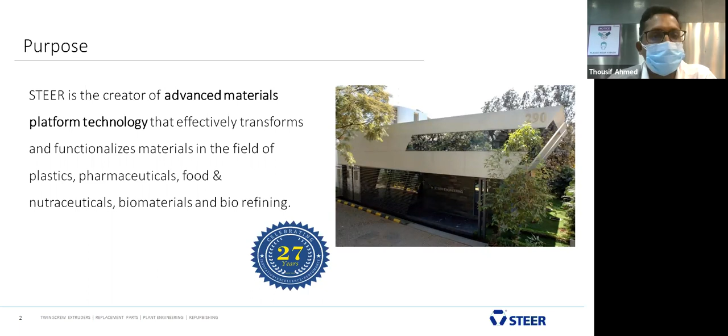Steer is a creator of advanced material platform technology. We focus on developing advanced materials which serve our society, industrial society, or even the nation. So it effectively transforms functionalized materials in the field of plastics, pharmaceuticals, food, nutraceuticals, biomaterials, and biorefining.

Some of the core people who drive and direct our organization and help us achieve our goals are Dr. Babu Padmanabhan, who is our MD and Chief Knowledge Officer. He is the founder of Steer Group. He has contributed to 100 plus patents which Steer has achieved, in different stages of approval. He is a creator of disruptive continuous manufacturing technologies. And Mr. Satish Padmanabhan is the joint managing director. He leads the corporate service group, and he also directs the whole group in the emerging business of Steerworld.

Mr. Subodh Jindal is the global CEO. He has more than 20 years of experience in managing businesses, and his expertise is in material science, life science, and market models. He is also a certified Six Sigma Black Belt with strong process orientation. Mr. Sanjay Shah is the Chief Business Officer. He leads the India, SAARC, Middle East, and Europe regions from the business point of view. He has more than 30 years of experience in the field of raw materials, machinery, and additives. He also has experience in sales, business development, project planning, and investment, so he has a wide area of expertise.

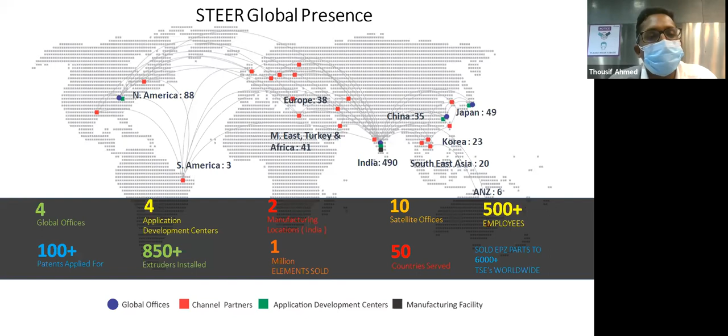As you can see, Steer is a company with global presence across the world. To give you some numbers, we have four global offices, with our main office in India. Apart from that, we have offices in North America, China, and Japan. At these global offices, we have our application development centers. We have 2 manufacturing units, Bangalore in India being the headquarters, and 1 more unit in Coimbatore. Apart from this, we have 10 satellite offices. We are a strong team of 500 plus employees. As I briefed, 100 plus patents are applied from Steer, and some of them are already approved. We have a global presence with 850 plus extruders worldwide.

We are proud to say that we are the only machine manufacturing company with vertical integration right from our own steel development till the extruder building. We have a foundry and casting in Coimbatore where we develop our own foundry material MOCs, and then we build our machines in-house. So 90% of our activity happens in-house. We have our own proprietary metallurgy. We develop our own elements, barrels, shafts. We also have our own facility for gearboxes, feeders, and panel manufacturing. We have 3 model platforms called Omega, Mega, and Alpha. We also cater for pharma and food processes, and we take up plant engineering for all sectors like plastic, pharma, and food intermediates.

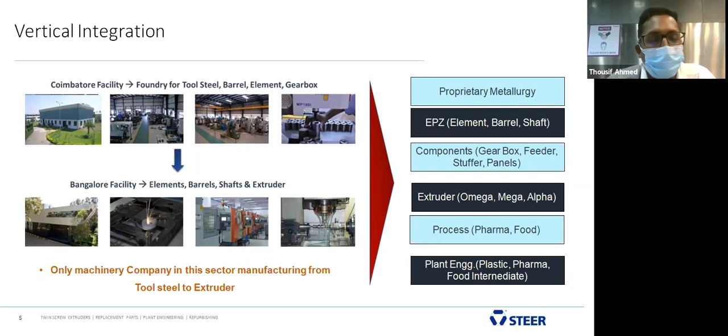We serve industries like polymer, biomaterials, powder coat, construction, pharmaceutical, and food. Polymer is the main industry where we have the highest presence. We supply machines for applications like engineering plastics, PP compounding, color masterbatch, and recycling polymers. Apart from this, we have a segment like biomaterials, which today's topic is related to. We have supplied machines for applications like PLA, PBAT compounds, and starch-based compounds. We have a presence in powder coat, mainly the paint industry, which uses twin screw extruders. In the construction business, we have long glass fiber reinforced PVC, which serves the construction area.

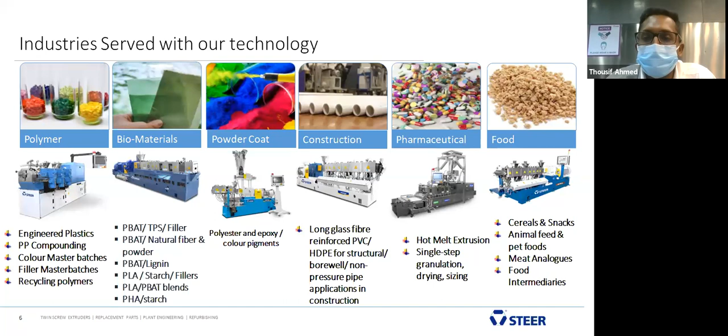We have a separate division called Steer Life, which manufactures machines for the pharmaceutical industry. All major pharma industries in the world are using our machines. And we have a separate segment where we cater to food, where we supply machines for cereals, snacks, meat analogs, and food intermediates.

These are some of the examples; it is not limited to that. As I briefed, we have 4 global locations where we have our application development centers, the main one being in India. Apart from that, we have them in China, USA, and Japan. This is the center where customers bring their material, do the trials, and see their material getting processed in person. They can feel it, they can test the results, they can get satisfied.

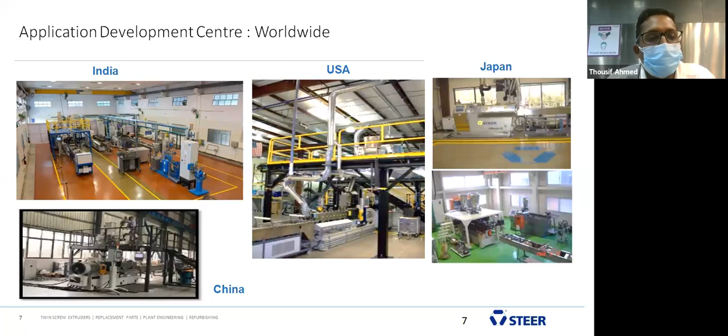After that, they go towards the investment in the extruder. Steer has 3 different platforms of product: Alpha, Mega, and Omega. The difference is based on the Do/Di. Alpha, being 1.49 Do/Di, is more suitable for high shear applications. That's why it is popular for applications like color masterbatch or recycling, which require greater mixing.

Whereas Mega is quite popular globally because of its Do/Di of 1.55, which is more commonly available across the world. It is suitable for torque-limited and shear-required types of applications. Some of them are engineering polymers, plastics, masterbatch, and PET. So these are applications which Mega is popular for.

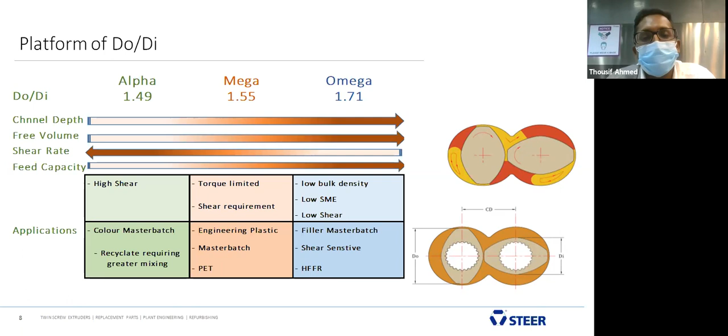And Omega is a proprietary design from Steer, which has a Do/Di of 1.71. It is suitable for low bulk density, low SME, and low shear applications. This is one of the most sold platforms from Steer, quite popular across the world. So it is suitable for applications like filler masterbatch, shear-sensitive applications, HFFR, and, what we are talking about today, bio applications, which are very shear sensitive. For such types of applications, Omega is useful.

So today's webinar, why is it important? Because of the following points. These are the opportunities. There is an emerging opportunity in starch-based compounding, which is driving the industry to look at TPS as a future growing segment. To name some, plastic consumption stands at 500 billion single-use plastic bags annually. And right now, as you all know, there is a complete ban on single-use plastic from various governments. So that is driving alternative material development.

The global thermoplastic starch market, as per 2019, stands at 179 kilo metric tons. The market is expected to see 7% year-on-year growth. The film segment is one of the major areas, with more than 48% of the market share in TPS. And starch-based blends with PLA hold more than 50% of the global bioplastic market. And the Asia Pacific region, being a low-cost producing hub, will see tremendous demand from global locations once single-use plastic becomes completely banned.

So this is an opportunity for the whole Asia Pacific region to take this as a new area of working. TPS is suitable for bags, films, and 3D print applications. As I briefed, many countries have started banning single-use plastic. This is an opportunity for all of the Asia Pacific region to grab. As per the Packaging Industry Association of India, the packaging sector in India itself will grow at 22 to 25%. So all these factors are driving the thermoplastic starch market to have tremendous growth in the future.

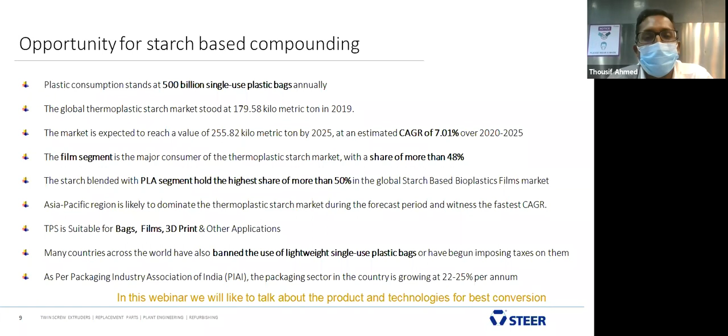In this webinar, we would like to talk about the product technologies and the best conversion possibilities from Steer's point of view. So from here on, I will request Dr. Prakash to take over and take you through the thermoplastic starch application and Steer's capability, what we have done and our expertise. Dr. Prakash, over to you.

Yeah, thank you so much, Thousif. Nice introduction about Steer, what Steer is doing, and what Steer's capability is. You made my life easier. You already covered most of Steer's business and all.

And my job is to explain what STEER technology is and what the difference is between standard technology versus FRT technology. This standard technology, over the last 40 years, is the Erdmenger profile. We call it a standard kneading block. There are 3 standard kneading blocks. One is the right-hand kneading block. The second one is the neutral kneading block. The third one is the left-hand kneading block. Erdmenger introduced it 40 years back, but there has not been much change in the screw elements.

For the last 40 years, many have been using it, and many processors compromise themselves to run new developments when it comes to shear-sensitive materials, and they try to run at lower RPM. But many extruders since the late 20th century are built with higher torque and higher RPM, and they are capable of handling even many engineering plastics and sensitive materials.

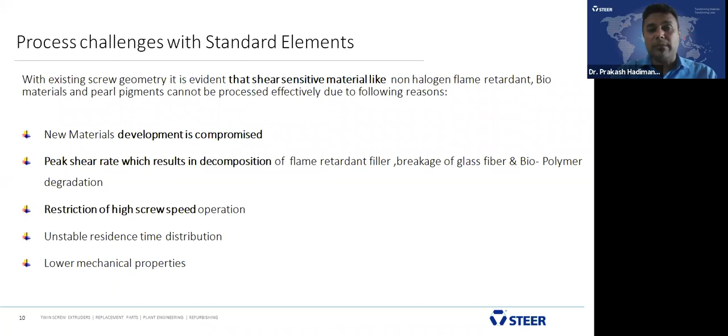There's no control on the residence time distribution, and shear rate is not uniform using standard technology. There is a variation in the wave, and that leads to an increase in the melt temperature. That melt temperature leads to reduced mechanical properties. To overcome these, STEER introduced fractional geometry technology.

The advantage of Omega is fractional geometry technology. It has lower temperature, narrow, constant clearance between screw to screw, higher torque and higher output, and it is self-wiping. And the DO by DI is 1.71, a deeper groove, so that between OD and ID we call it a shovel. It controls peak shear, enabling higher output and higher screw speed.

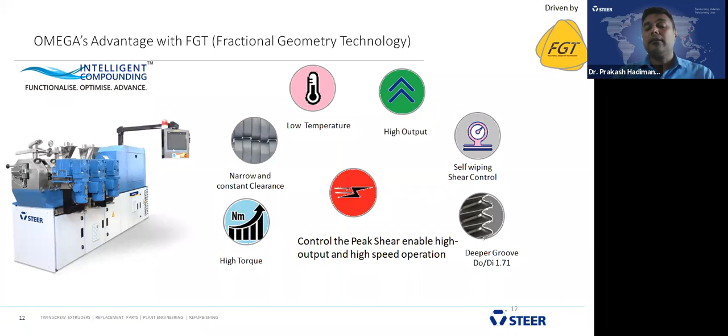In today's webinar, we are going to discuss more on thermoplastic biomaterials. Thermoplastic biomaterials mixed with starch, what is the behavior? And we did case studies on standard technology versus FRT technology.

What are biorefineries? Biorefineries are mainly based on carbohydrates. They contain sugar, starch, and cellulose. These are the primary chemicals, and also lignin, proteins, and fats. And the secondary or intermediate products are alcohol, organic acids, sugar, and sugar derivatives.

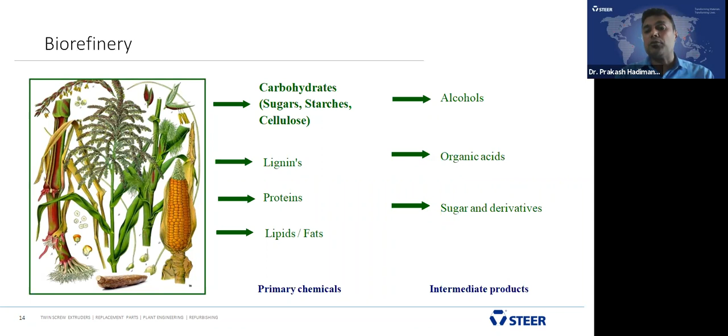When you go for automotive applications, it stays longer, at least more than 5 years. But a biodegradable polymer loses its property within 2 to 3 months. We need to manage both because biodegradable polymers are user friendly, and when you bury them into the soil, within a span of 1.5 months they lose their mechanical property.

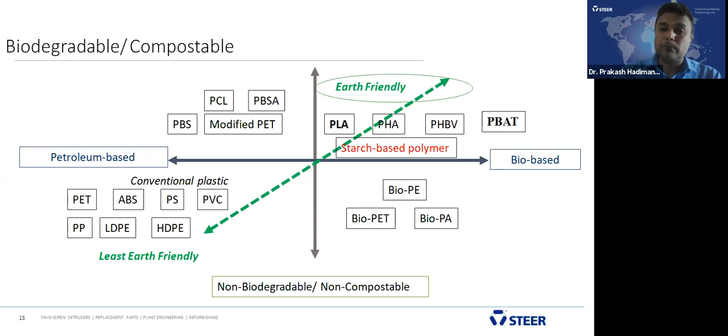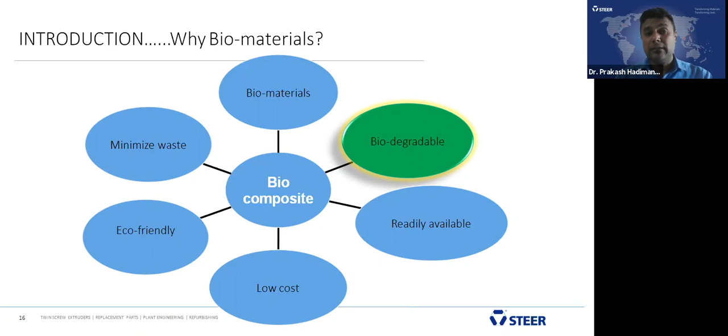Why do you need biomaterials? Biomaterials are biodegradable, readily available, lower cost, eco-friendly, and minimize waste. For that, biomaterials have advantages. Biodegradable starch-based applications, there are some examples. They make containers and food packaging, carry bags, and starch foam packaging applications. These are some examples that can be utilized for biodegradable starch-based applications.

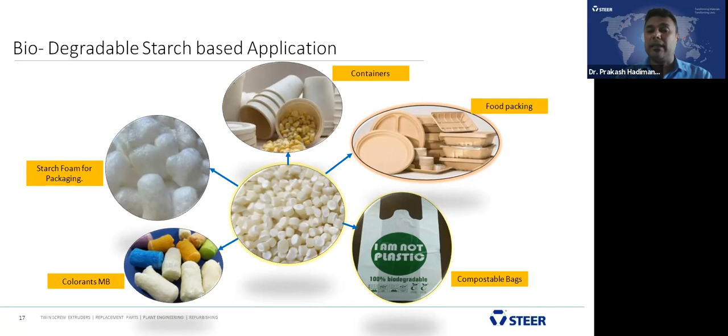In this case study, we have used PLA, polylactic acid. The second one is polybutylene adipate co-terephthalate, PBAT, and the last one is starch. We use 3 materials. PLA is an aliphatic polyester derived from renewable sources, and it is biodegradable. PLA has higher modulus but is brittle in nature. It's difficult to get flexibility; elongation is lower in PLA.

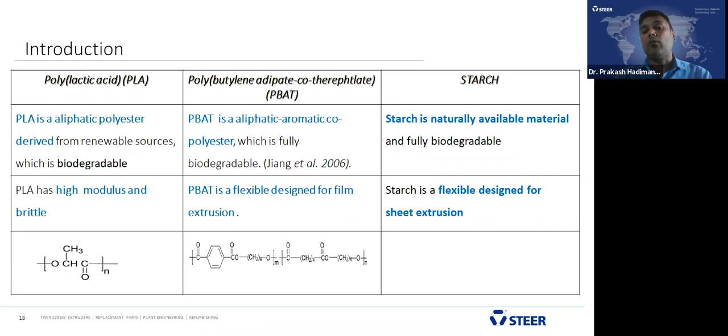PBAT is an aliphatic and aromatic copolyester. It is 100% biodegradable, with better elongation but lower tensile strength and flexural modulus. If you want to have both, we need to blend PLA and PBAT to get the required mechanical property. And starch is naturally available, for example corn starch and rice starch, there are many. It is 100% biodegradable and also gives better elongation and flexibility.

When we are processing TPS starch, there are some challenges during the process. What are those challenges? One is hopper flooding. When you try to feed starch from the intake and there is hopper flooding, it chokes the hopper and is difficult to process. This is one challenge. The second one is that these are sensitive to temperature.

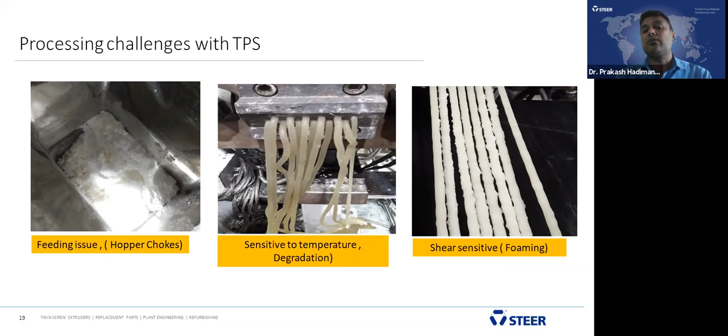When you are running at higher RPM using standard technology, black specks and color changes appear in the final product. And if you apply a little high peak shear, because it's sensitive to temperature, it forms foaming and a rough surface. That shows the starch was not dispersed completely in the PBAT.

In today's case studies, there are many combinations we did. The first combination is PBAT and starch. We added starch from 50 to 80 weight% with the PBAT. The second is PLA starch. The starch concentration we added was 20 to 50 weight%.

And the third category, PBAT with a mineral filler. In the mineral filler, we went up to 60 weight%. We have used calcium carbonate mineral and also talc mineral. These two we have utilized with PBAT.

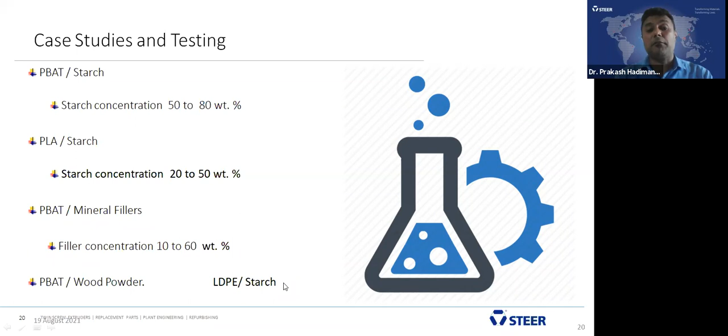And the PBAT with wood powder and also lignin, we used up to 40% filling of wood powder and lignin. And lastly, we used LDPE and starch. LDPE is not biodegradable, starch is biodegradable. We went up to 38% of filling, and we processed it.

This was the extrusion setup we used: a 40 millimeter H class, 135 kilowatt, maximum screw speed 1200, specific torque 16.8 and Do/Di 1.71. And we used both technologies, standard and FGT technology.

We collected all the samples and extruded them, and finally fabricated the samples by injection molding into specimens. We did the characterization. In the next slide, we are going to discuss the characterization.

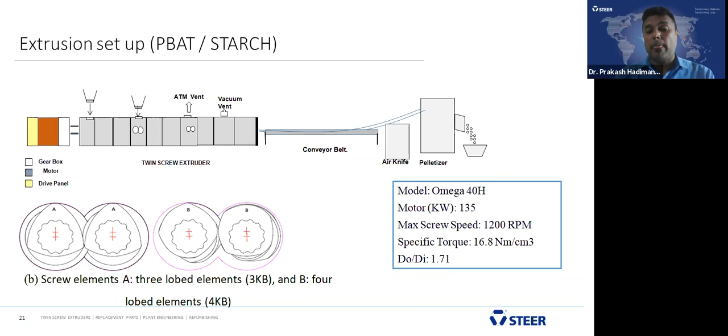When using standard and FGT technology, we observed with standard technology, after 50% starch loading, a rough surface and also foaming, meaning the starch started gelatinizing inside the extruder. The foaming started and was difficult to control in the standard technology.

The same product we used with FGT technology. You see here, we have a smooth surface and well-dispersed strands, smoother on the surface, with no rough surface and no foaming observed using FGT technology. Also, we achieved higher throughput at higher RPM.

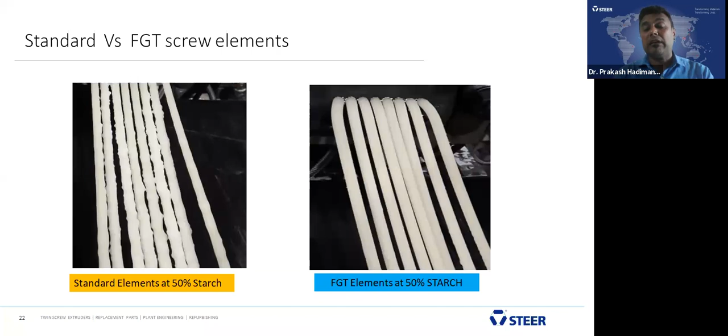I will explain the phenomena and the effect of using these two FGT technology elements. One is the melt formation element, the second is fractional mixing elements. The melt formation elements give you highly effective uniaxial and biaxial stirring as well as disruptive flow into the PBAT and the starch, and the ability to stretch, fold, and squeeze the material in a tightly controlled kneading cycle. The melt formation element does that.

And it has a shorter lead angle to increase the frequency of the folding. A shorter lead helps to increase the frequency of folding and elongation. And it also reduces the peak shear and improves the uniformity of the mixing in the PBAT and starch.

Regarding the function of FME, the addition of starch and polyester resin improves the elongational flow using FME elements, and the fractional mixing elements improve starch wetting with the PBAT and the biomaterials and reduce the water intake into the final compound.

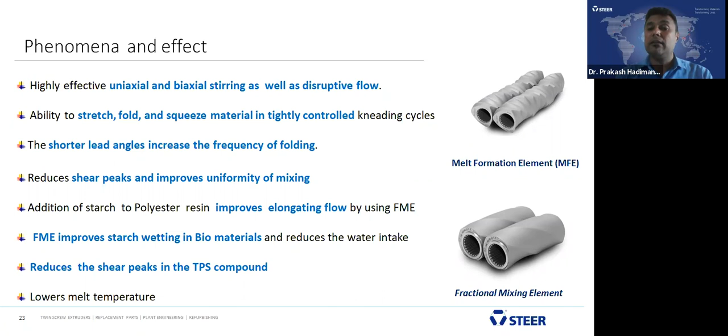And it also reduces shear peaks in the TPS compounds, gives a lower melt temperature, increases the miscibility of the final product and increases mechanical properties. And in the morphology study, we observed better dispersion of these two blends by using melt formation elements and fractional mixing elements.

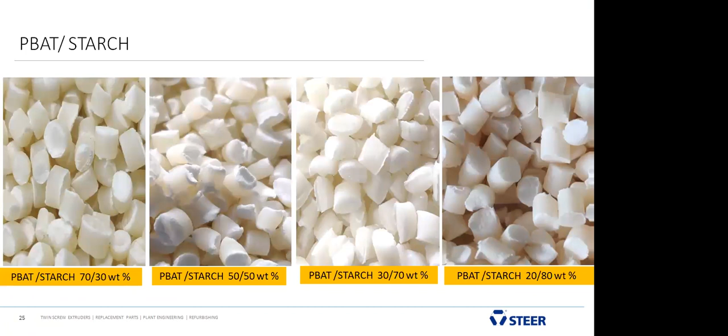After compounding, this is all with FGT technology, and those are the pellets. We started with the addition of starch at 30%, 38%, with 70% PBAT. These are the pellets. You see, we didn't observe any black specks or color change on the pellets. And we observed miscible pellets, meaning homogeneous pellets, no rough surface.

And at 50-50, meaning 50% starch and 50% PBAT, here also no color change. It retains its color, with better dispersion and miscibility for both blends. There is no black speck, no rough surface. And at 70% starch, no change. And at 20/80, 80% starch, we observed a slight change in color, but it was good.

And up to 50-50%, we were able to make blown film and get better elongational flow. At 70% and 80% starch, because of the viscosity, we were not able to make blown film, but these two blends can be utilized for injection molding.

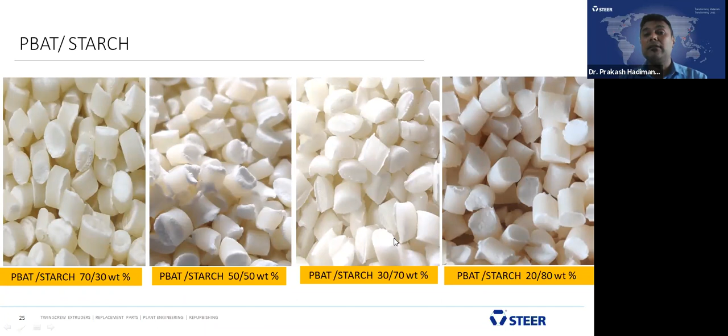Finally, we went for sheet line and injection molding, like where you have spoons and all. Those can be utilized for other applications. Where you want carry bags and all, 50-50 is a good amount. And we'll try to make it 65 to get better results in the blown film.

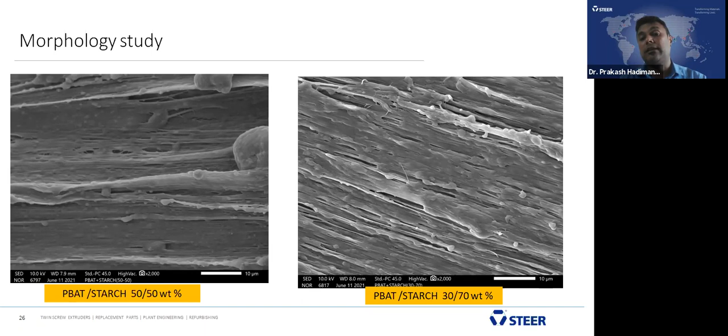At 30-70, at 70% starch, because only 30% is PBAT, we could observe a slightly fractured surface, because the polymer content is less and the viscosity increases, but the distribution and dispersion was very good. You see the starch particles here, distributed and dispersed completely. Even though we get reduced elongation, we are getting better tensile and other properties, so that can be utilized for injection molding applications.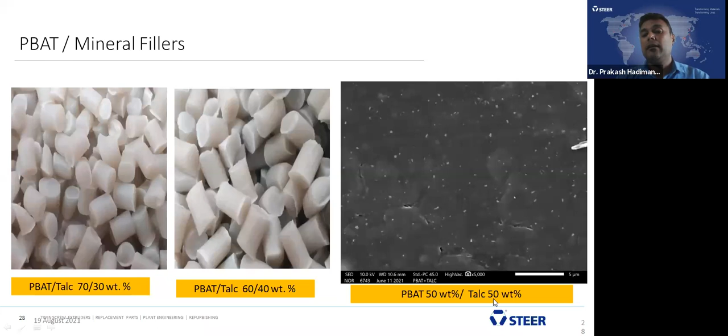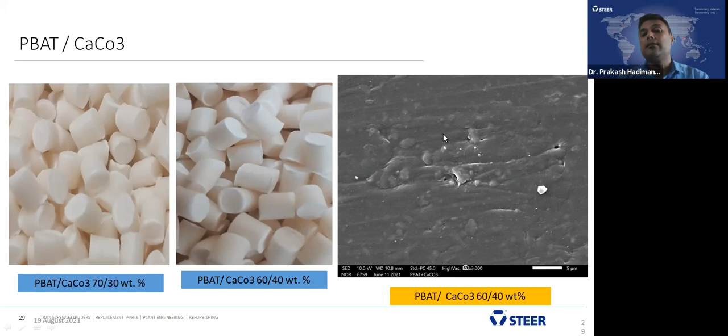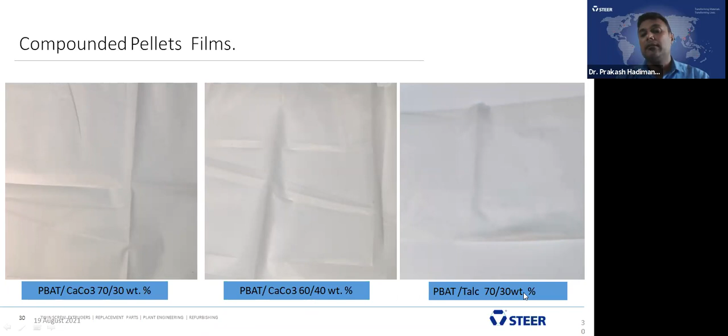And we did the blown film for PBAT and calcium carbonate, 70-30 and 60-40 combinations, and also with talc. No challenges were observed; it was very smooth running of the carry bags, no black specks, and dispersion was fantastic. These are the blown film photos, with 30% calcium carbonate and 30% talc in both cases.

The results show PBAT with calcium carbonate and talc separately. At 30% and 40% calcium carbonate with PBAT, the trend shows that addition of calcium carbonate increases the impact strength, from 30 kilojoules per meter square to 34. But if you compare these two, talc gives better mechanical property: 30% talc gives 44.63 kilojoules per meter square, and a further 10%, at 40%, gives 51.38 impact strength. That indicates talc gives better mechanical property compared to calcium carbonate.

When we come to flexural modulus, the stiffness, the same trend is here also. The calcium carbonate addition with PBAT shows 171 megapascal, but the addition of 40% talc gives almost three times the result of the calcium carbonate compound. You see here 452 megapascal for PBAT and talc 40%, while PBAT and calcium carbonate 40% gives 171 megapascal. We are getting almost twice the mechanical property.

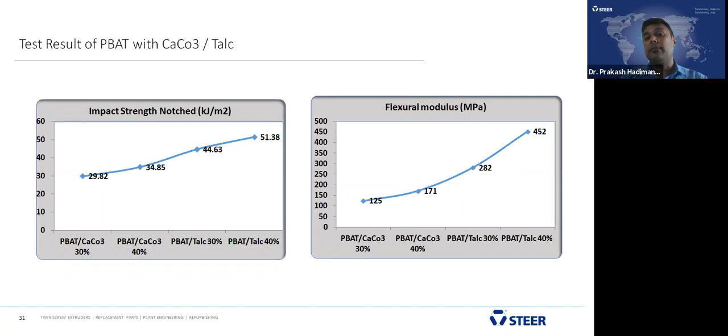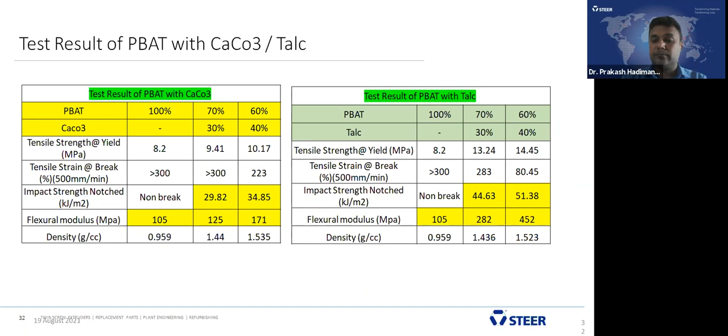If you compare both with the virgin PBAT polymer, the tensile is 8.2. Addition of calcium carbonate increases it up to 10.17 megapascal. But with talc, there is a further increase compared to PBAT with calcium carbonate, and impact strength also increases. With the addition of talc and calcium carbonate, we observe an increase in pellet density, flexural modulus, and impact strength. Addition of talc gives you increased impact, flexural modulus and tensile strength.

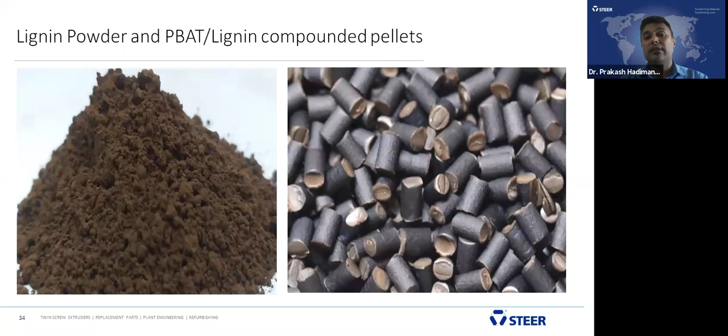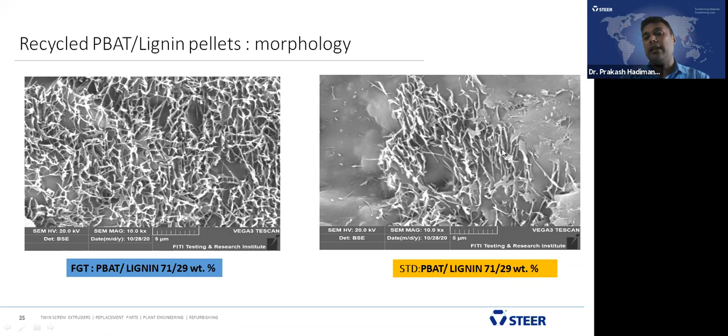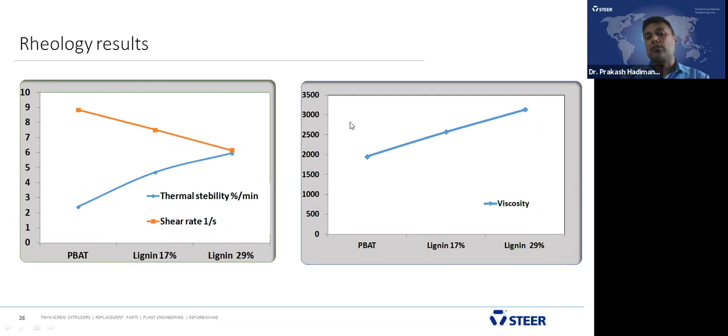When it comes to viscosity, addition of lignin increases the viscosity of the final compound. This is PBAT's final viscosity here, and addition of lignin slightly increases it, going up to this level.

For mechanical property, we compared impact strength of standard versus FGT. The standard showed impact strength of 36.7 kilojoules per meter square, while FGT with the same combination provided 39.48. For flexural modulus, addition of lignin increases the flexural modulus.

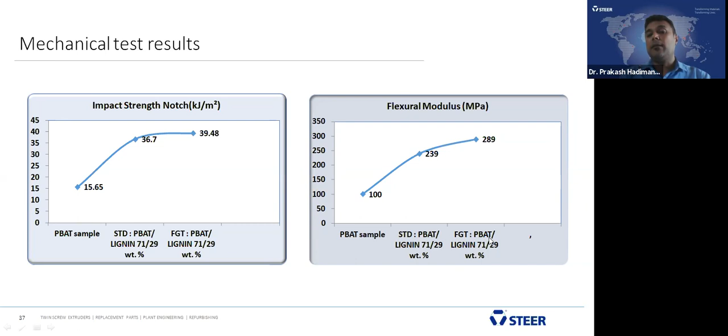Compared to standard, FGT gives the best results for flexural modulus: standard is 239 megapascal, and FGT gives 289. Comparing both, FGT gives better impact strength and flexural modulus compared to our standard technology.

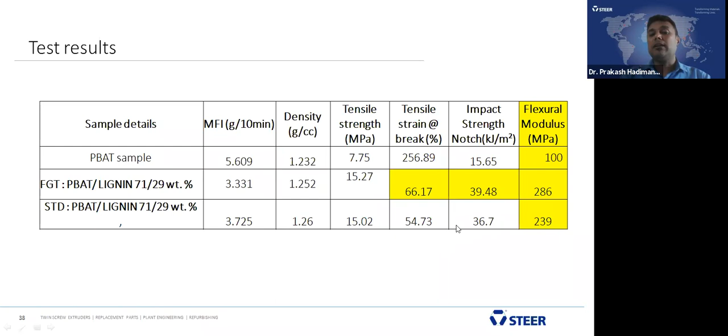For wood powder, we processed PBAT and wood powder using our Omega 40H twin screw. We started with 20% feeding of wood powder, then 30%. Dispersion was good, with no black speck and no color changing. It retains the virgin color of the wood.

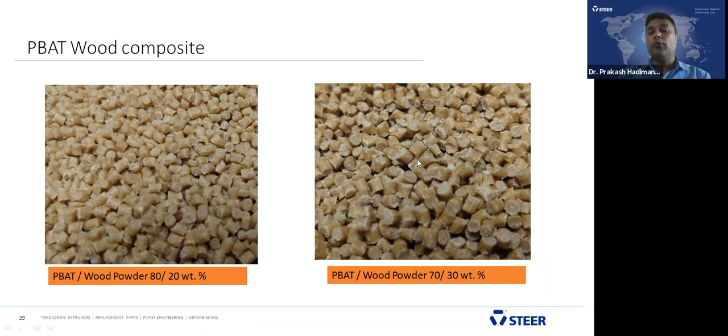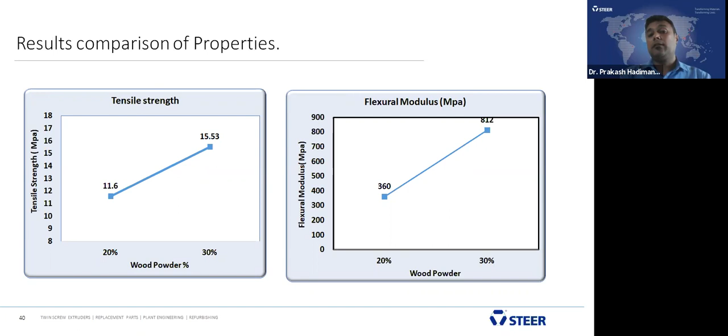We got better impact strength using this, with no fractured surface in the pellets. Comparing addition of wood powder from 20% to 30%, tensile strength increases using FGT technology. The flexural modulus almost doubles—just a 10% increase in wood powder increases flexural modulus to 812 megapascal, almost double, showing flexural modulus increases with addition of wood.

Finally, we conclude the FGT technology showed higher concentration of starch addition with PBAT. Starch gives up to 80% addition with just 20% PBAT. This was not possible in the standard technology, which stopped at 50-50, meaning only 50% starch, while FGT provides almost 80% starch addition.

The FGT technology showed higher mechanical property and better miscibility of PBAT and starch final compound, and also showed higher mechanical property for most cases compared to standard technology. Addition of wood powder and lignin powder increases tensile strength, flexural modulus, and impact strength. Addition of lignin powder and PBAT increases impact and flexural modulus using FGT technology compared with standard technology.

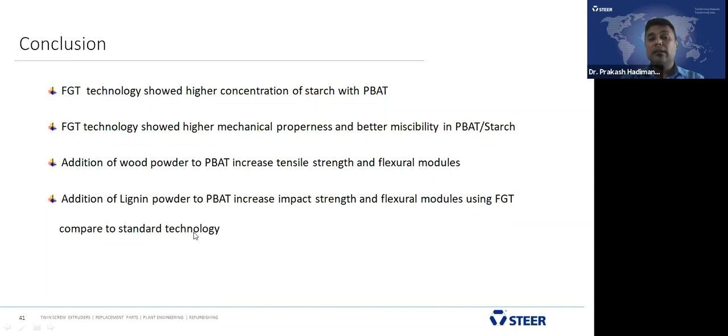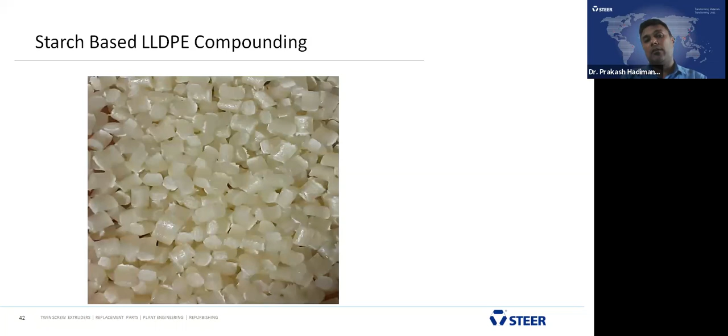Finally, we did the compound using starch-based LLDPE with 30% starch compounding. No black speck here. The dispersion was good, and we carried out mechanical property testing, getting better mechanical property and also better blown film using this compound.